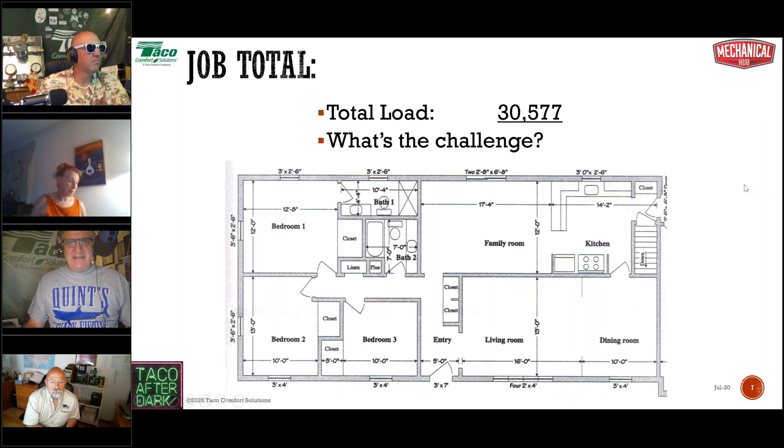It's making domestic hot water, whether it's in a combi unit or whether you have an indirect. So there's all kinds of challenges here when we're talking about a boiler that small. So we're going to look at some options here for boilers that small. We picked a couple of different boilers to consider from NTI and from Weil-McLain. So we're going to take a look first at just an NTI heat-only boiler, the NTI TX51. And I chose that one because, as you can see here, it has a net AHRI output of 45,000.

Now, net AHRI, for you old timers out there, you might be familiar with the term net IBR. Well, net AHRI is the exact same thing, but with a different wrapping on it. AHRI bought IBR, so IBR really is no more, it's AHRI. So the net AHRI output is your net IBR output. So 45,000, that's pretty doggone close, okay? From an input standpoint, it's 7.1 to 57 MBH. That's about an 8-to-1 turndown ratio.

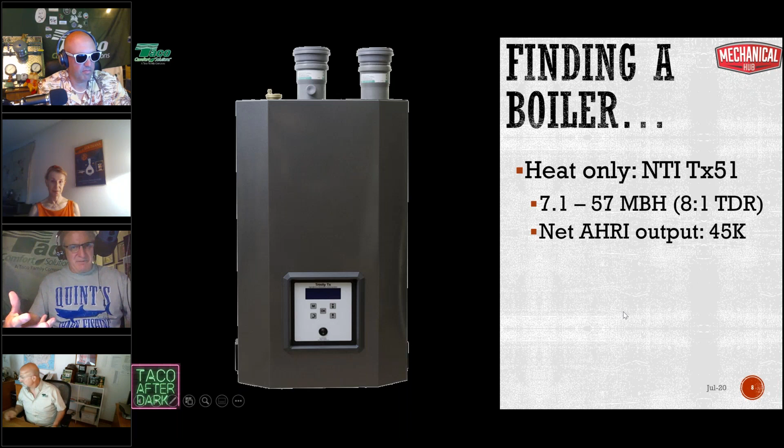But even at that low firing rate, that boiler's still going to be kind of on the big side for this project. It's not bad, but it's still going to be kind of on the big side. When we get into talking about boiler piping later on today and also in upcoming weeks, we'll be talking about how in something like this, a buffer tank really starts to become really important when you want to try and maintain the peak efficiency of that boiler, operationally speaking, not necessarily just combustion efficiency.

Now, better still, we could take another look at the NTI TRX 085. Now, that's a 9.4 to 85 MBH with an 11-to-1 turndown ratio. The DOE output is 79,000. The net AHRI is 69,000. If we had to use this to make domestic hot water, this might be a possibility here. That would be a benefit to us. With that 11-to-1 turndown ratio, that still helps us with the smaller load, but we'll still probably want to look at a buffer tank in this application, I would think.

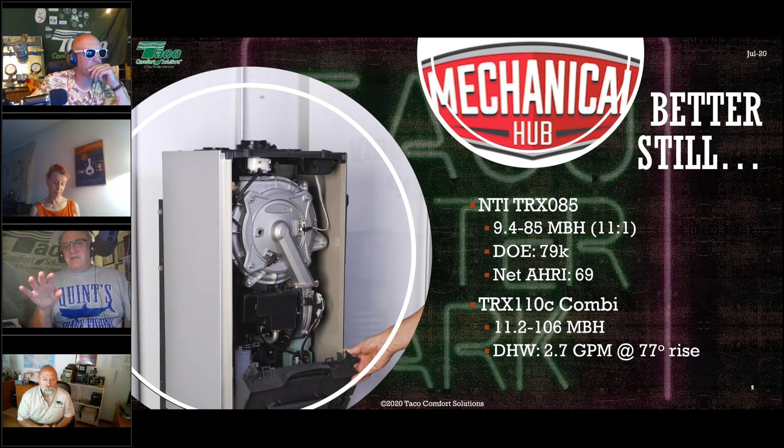If we wanted to go with a combi unit, we'd be looking at the TRX 110C. Now that's a boiler that'll do both domestic hot water and your heating system water in sort of an instantaneous or tankless type of situation. Now we're talking 11.2 to 106 MBH, again, still an 11-to-1 turndown ratio. Now your domestic hot water continuous flow is 2.7 GPM at a 77-degree rise. So if you got 50-degree water coming in, that's 127-degree water coming out, which in most cases, since you're not storing, that's probably going to be okay.

At 2.7 gallons per minute, we're not dealing with 3 showers and a hot tub all at the same time. Okay, you've got some limitations here, but in most normal applications, we probably should be okay.

And Jason Mangos, I saw you out there. If you're out there, or Wheels, if you're out there too, if you want to chime in on that output and what that means, that would be awesome. That way we give our guys a little bit more info on what that really means.

So these are some NTI options for you. And again, remember, 30,000 BTU max. That's on the coldest day of the year for heat. So again, any one of these boilers we've picked are going to be too big. We're not going to have an 11-to-1 turndown ratio if we use either one of these for heating. We're maybe going to have a 3-to-1 or 4-to-1 turndown ratio. Okay, 9.4 MBH. It's probably going to be about a 3-to-1 turndown ratio because it's just a small load. But that's better than a 2-to-1. Okay, the previous model might work out a little bit better on that end.

If we were to look at a Weil-McLain option, I'm going to look at a ModCon and just a standard efficiency model. We're taking a look at this one, the WM97+ 70CT. There's a lot of syllables there to digest. It's a small boiler, again, 14 to 70 MBH. It's a 5-to-1 turndown ratio. Its DOE output is 65,000. They don't list an AHRI output for that one. So it's 65,000. Boiler's still twice as big as it needs to be.

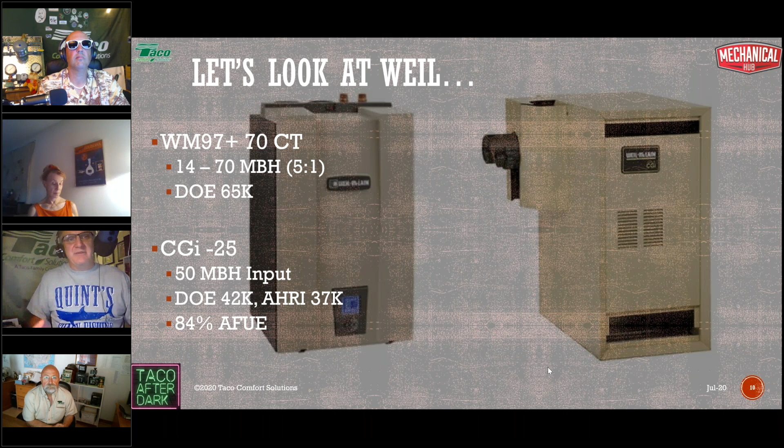And I think where you were going with this, you may find that you need a larger tank. You can certainly get around that with a much larger storage tank, so you're storing more water for those sudden dumps. If it's 2 showers and you never run them at the same time, well, then we've got different choices here. All right, let's take a look at some indirects here now as well.

So to figure recovery, this is your formula to figure the recovery that you can get out of a boiler. It's about the BTUs you have available at the boiler to make domestic hot water. You simply divide that boiler's DOE output by 45,000. Where does 45,000 come from? Well, we multiply 8.33, which is the weight of 1 gallon of water, times 60, the number of minutes in an hour, times 90. That's the DOE recommended temperature rise. That's 50 up to 140.

Now understand 50 up to 140 is going to give us a boatload of room here, okay? Because we're not going to take a bath in 140 degree water, not twice anyway. And we're not always going to be bringing in 50 degree water. That's considered a worst case scenario, unless you're in a place like Alaska where the water comes out of the ground frozen, basically. So you've got to make those different adjustments. But this is kind of a good rule to work with.

So it's the DOE output of the boiler divided by 45,000. So let's take a look at that NTI TRX 085. Okay, so that DOE output at max fire was 79,000 BTUs.

Divide that by 45,000, that gives us 1.75 gallons per minute worth of recovery. That's what it can do. Doesn't matter anything else. That's all the BTUs it has available. Okay, that's all it can do. Now 1.75 gallons per minute times 60 minutes, that gives us an overall 1 hour recovery of 105 gallons per hour. So we can recover at a rate of 105 gallons per hour.

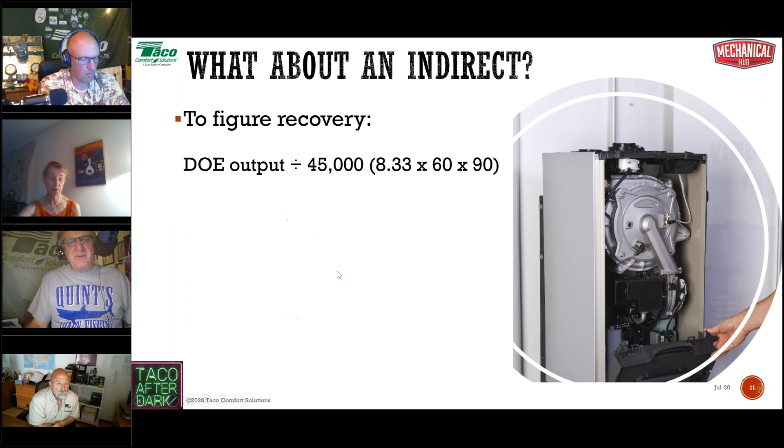So if we put that 34 gallons in with that 105 gallons worth of recovery, that gives us our first hour rating. That's how first hour ratings come by. Our first hour rating for a 45-gallon tank with this boiler, that's 139 gallons for the first hour, or we are now recovering at a rate of 2.2 gallons per minute at 140-degree water.

Now, is that going to be enough? Well, we got to do a little bit of math on the flip side to figure that out. But in a lot of cases, it probably will be. With your shower, you're not taking a bath at 140 degrees. You're tempering it down to 106, 107, or whatever it is you take a shower in. You've got your dishwasher running at a certain temperature and all these other things.

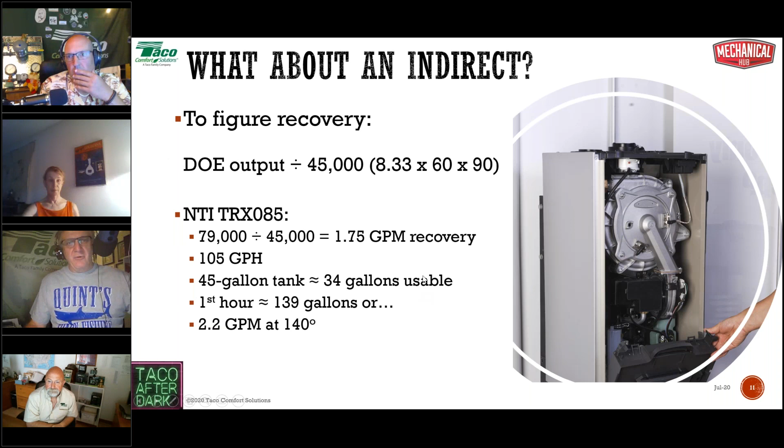And you may even put a tempering valve at the tank itself to extend that capability. So there's a lot of places to play here to see if you're going to have enough. But this at least gives you a starting point so you know what you realistically have to deal with this smaller boiler.

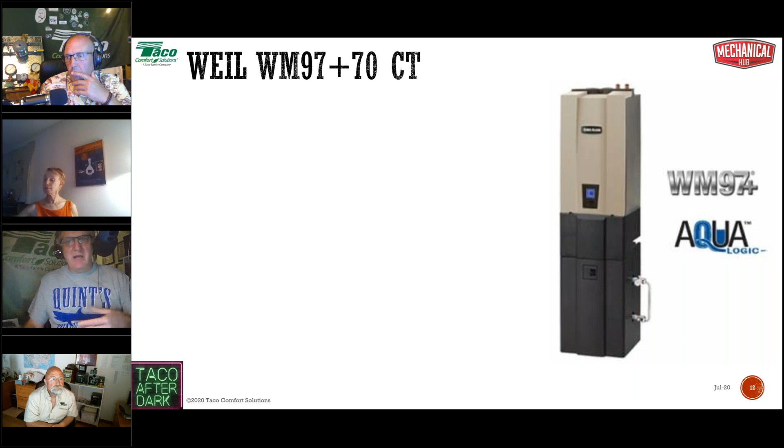Now let's take another step forward with this. The reason I chose the WM97 plus 70 is because you have this optional tank that goes with it. It comes with the Aqualogic. It's an 18-gallon tank that connects right to the boiler. 18 gallons, that's 13 and a half gallons of standby, 13 and a half gallons of usable water.

At 65,000 BTUs, which is the DOE rating, divided by 45,000, that gives us 1.44 gallons per minute worth of recovery. We multiply that out by 60 minutes. That's 86 and a half gallons per hour plus 13 and a half gallons usable. Now we have 100 first hour gallons, or roughly 1.67 gallons per minute at 140 degrees.

Again, we have to figure out A, how long, B, how hot, and C, what's the flow rate at the most important fixture. If it's the shower, if this is going into a house with a 6-person shower and you got nozzles coming at you from 14 different directions, they're a heck of a lot of fun, but it's not going to be fun for very long. You got about 3, maybe 4 minutes and then you're done. So you always got to make sure, because you don't want to be on the other end of that phone call, I'll tell you what.

So I told you, this thing goes sideways in a hurry sometimes. So this is the math, basically. This is the math behind that one.

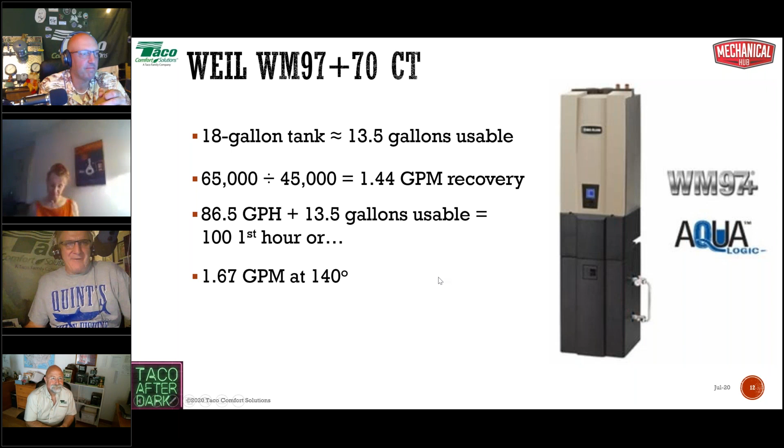In my US Boiler Aspen digitally, I can set the max BTU load on heating, and then my 10-to-1 ratio moves within that parameter. Well, that's a pretty cool boiler. That's really neat with that control. That's that Sage control that we also make on the Burnham boiler. Very good. So they get pretty cool options with what US Boiler was able to do when we designed that Sage controller that ties into their system too. It really gains a tremendous amount of efficiency into the system.

Very good. And Bill says with the water temperatures we can use for heating, we really do need to condense. Yeah, again, if we're designing around a low temperature system, absolutely. Now, if we got a multi-temperature, multi-load system, we got to make some decisions.

And there's always that option of using a high temperature boiler and then mixing down for the lower temperature stuff. If you've got 2 different temperatures, there's always that possibility. I mean, the industry is moving towards ModCon, and that's just the way it is, because it's the better choice. On a case-by-case basis, you do have to take a little bit of a different look at it. And something like this, I'm not entirely sure which way I would go, to be honest with you.

I don't know. What do you guys think? If this was your house, Dave and Rick, which way would you go for a boiler? I'm gonna KISS it. Keep it simple, stupid. Oh yeah. I can't be the only guy that knows what's going on, if somebody else comes walking into that boiler room and sees what the heck's going on here. So you lose a little bit of the efficiency on one side. You try the best you can, but I'm still looking at keeping it simple in my boiler room.

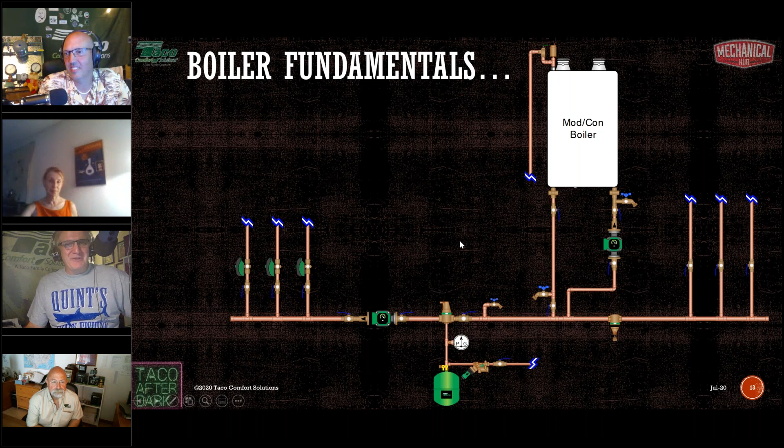All right. Let's take a look real quick at some boiler piping fundamentals before we turn it over to Carol. Again, ModCon boilers, just looking at your moose antler piping. And we're going to get into this next week a little bit deeper on the specifics of piping up a ModCon boiler and sizing the boiler pump as well as the system pumps. The air separator, just a couple of little things I want to show you. That air separator, expansion tank, automatic fill setup is sitting right there on the supply side.

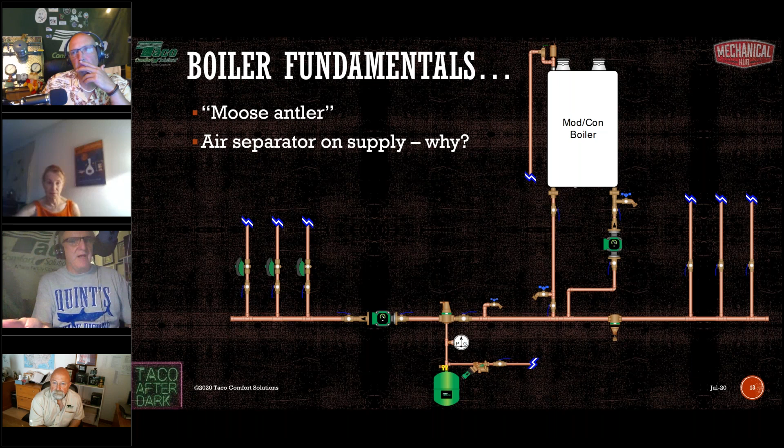Any guesses on why we put the air separator on the supply? That's where it should go, but why would you put the air separator on the supply? And if you know that answer, just type it on in. And while we're at it, the mag dirt separator, which you see over here, is always on the return. Why is the mag dirt separator always on the return? Why is it supposed to be on the return?

Okay. When we're talking about putting the air separator on the supply, a couple of you guys got it already. Very good. That's where the water's the hottest. One of those laws, is it Boyle's law or Henry's law? I can never keep them straight. One of those laws says that the higher the temperature of the water, the less capable that water is of holding dissolved gases in solution. Just think about boiling water for a second. The dissolved gases in the water start to turn into bubbles and they bubble right out. Is that Boyle's law, Wheels? I can never keep those two straight.

So if that's the case, the hotter the water, the less capable that water is of holding dissolved gases in solution, meaning those dissolved gases tend towards bubbleness. Well, why not put the air letter outer in the position on the system where the air wants to get out the mostest, where the water's the hottest? Why fight nature? The air wants to get out. We don't want it in there. Let's let it out. So that's why the air separator always goes on the supply where the water is the hottest.

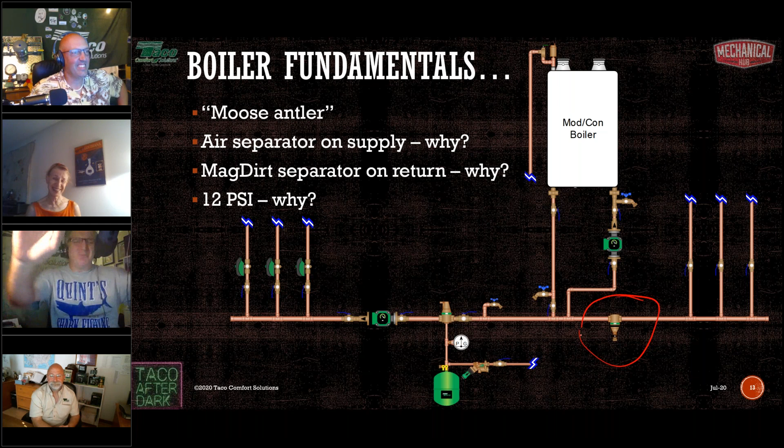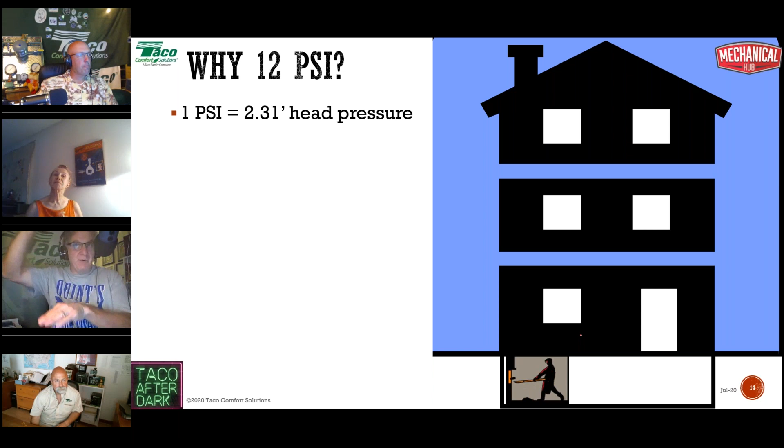But why 12 psi? Well, again, we learned this day one of plumbing school. 1 psi is equal to 2.31 feet of head pressure. A column of water 28 inches high, or 2.31 feet high, will have a gauge pressure at the bottom of 1 psi. All right, so 1 psi is equal to 2.31 feet. If we fill a system to 12 psi, 12 psi times 2.31 feet per psi, the psi's cancel each other out, and that gives us 27.72 feet.

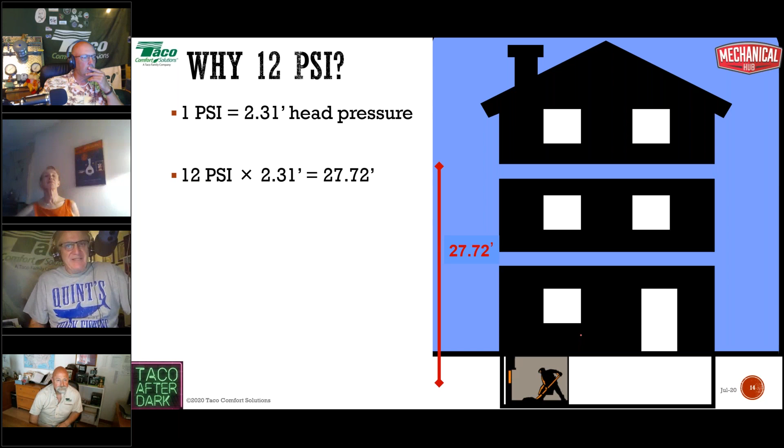That's the pressure needed to lift the column of water 27.72 feet in the air, and that, friends, is enough pressure to keep the radiation filled and pressurized on the upper levels of a normal residential structure with a little bit left over. Okay, so that's why 12. That's why expansion tanks come charged to 12. That's why pressure reducing valves are preset to 12 PSI. That's the whole 12 PSI magic right there.

If you have a taller structure, maybe you need to fill to 15 or whatever. Again, a little bit of math. And whatever you do to change the pressure on the pressure reducing valve for the system, you must also do to the air side of the expansion tank. And the only way to change the pressure on the air side of the expansion tank is to do it when there's no water on the water side. So you have to do it when there's no pressure on the water side. So that's always a fun little game to play.

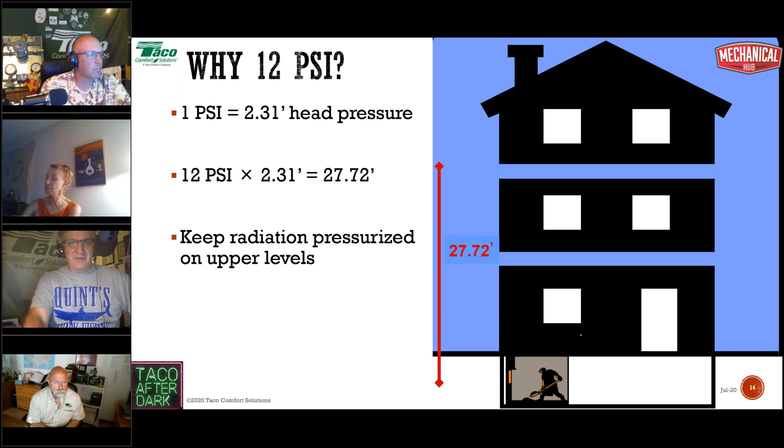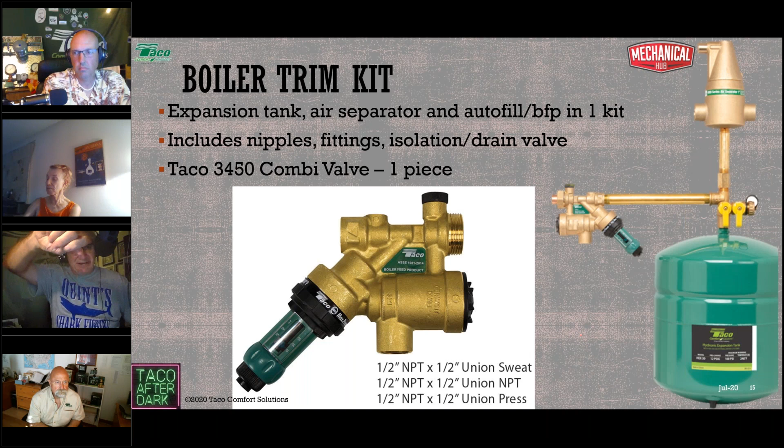I've never seen that on any other automatic fill valve. Most of them have that little set screw or something on the top where you got to kind of adjust it and kind of guess and hope where you are. Okay, but this one does not have that. This one, you can adjust it by turning the green knob, and you'll see where the pressure is set, which is terrific.

Now, as a question here, does it go into fast fill capabilities? Absolutely. That button, and this is where it gets really cool, that button on the end of the green extension, you press that in and it goes into fast fill and it stays in fast fill. And here's the cool thing: with a standard fast fill valve, you've got to lift a valve, right? You've got to lift a little lever or handle or something to put it into fast fill. And then you've got to go over and purge, right?

You've got your hose and you're closing a valve, opening up a drain, and then blowing out the air. And when all the air is out and you've got a nice steady stream of water, then you go back, you close the drain, you open up the valve, and then you've got to run back to the fast fill valve and get it out of fast fill before you blow the relief valve.

I want honest answers here. How many of you have not got back in time at least once in your career and then have had the 30-pound relief valve blow? If you say no, I know you're lying. It's pretty much everybody in there who's done that, right?

Well, with this, if you press it, it stays in fast fill until you hit the preset pressure of 12 PSI. When it hits 12 PSI, bang, it comes out of fast fill automatically. So it kind of saves you from that embarrassing, oh crap, what am I going to do with all this water thing? So that's a neat feature, neat function to that 3450 combi valve. And it's a nice little compact one-piece setup. And as you see, it's sweat, union, it's press. You have it in a lot of different options.

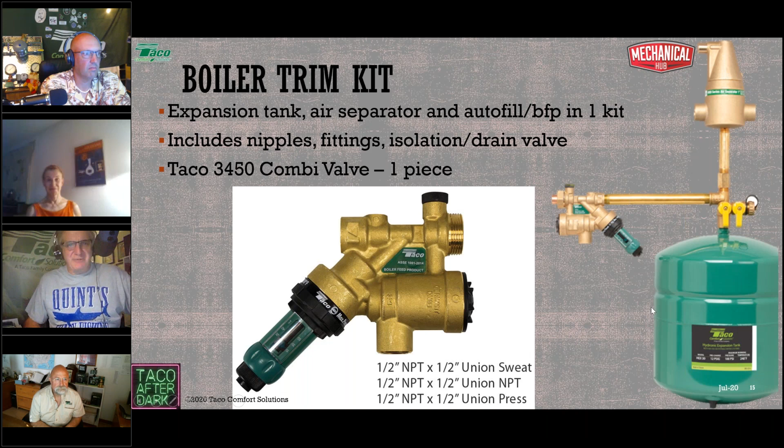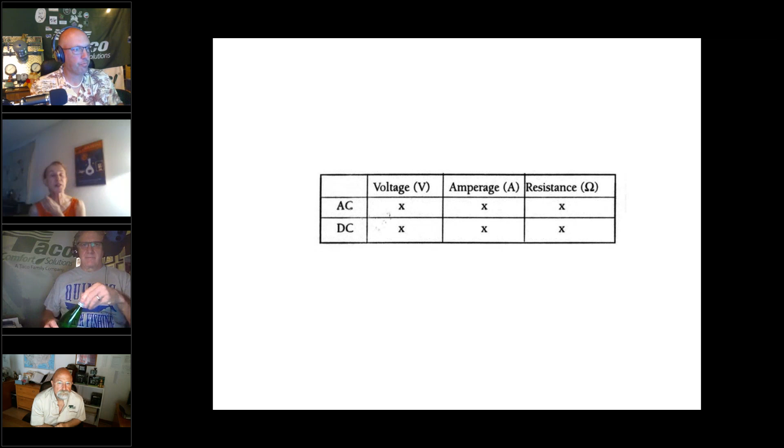A meter, this is all review stuff for most of you probably. A multimeter measures voltage, amperage, resistance. Resistance is the same as continuity, though sometimes it's shown different on a meter. And you can set it for AC electricity, alternating current, or direct current. That's batteries mostly. When we're using a meter for controls, we are looking at AC voltage and AC resistance. The rest of those possible functions we're not going to use.

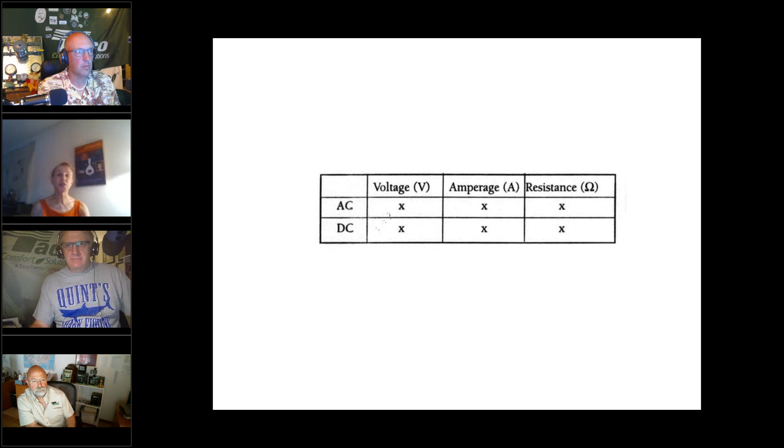We used to use the amperage back when thermostats had an anticipator, but now that thermostats are digital, we don't need to do that anymore. Meter math. This slide answers a lot of questions about what the heck is going on with a meter and why is my meter always broke. A meter is a subtraction machine. So picture your two leads, your red one and your black one.

What the meter display is going to show you is the difference between the voltage that those two leads or probes measure. So if you have 24 volts on one side of, let's say, a switch, that's one terminal, and 0 volts on the other, the meter is going to show you 24 volts because the meter is doing simple math. 24 volts minus 0 volts is 24 volts. People often think that the meter should be showing 0 because the switch is open. It doesn't work that way.

On the flip side, if you have a closed switch, for example, the meter is going to sense 24 volts on both sides or both terminals of that switch. 24 volts minus 24 volts is 0 volts. If 0 and 0 happens, of course you have 0, and the same thing holds for 120 volts.

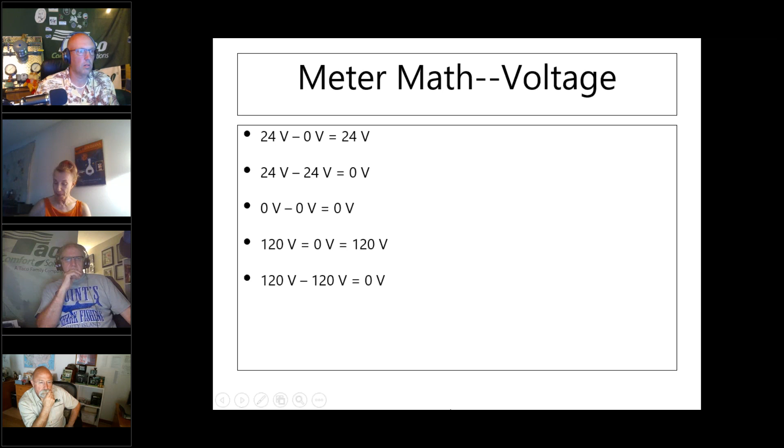If you think about a light switch, well, you have the position of the switch telling you up is closed and down is open, or on and off. But for something like, say, a limit switch or an end switch on a valve, you don't know by its position whether it's open or closed, so you might want to find out. And this would be a way to do it.

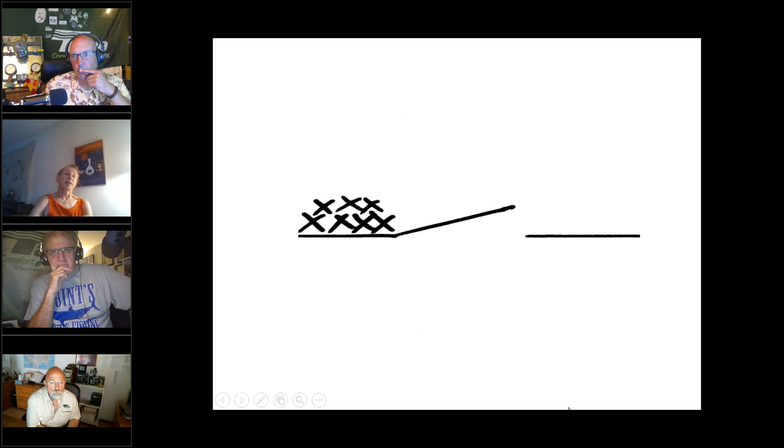Here is my little drawing of electricity guys. So a lot of classes will talk about electrons having to do with the electricity, and are electrons this way or that way? It doesn't matter. What really matters for what we do anyway, what we need to know is: is there a pile of electricity guys on one side of the switch and not on the other? So the meter will tell us.

If the switch, this is the symbol for a switch, is open, there's the opening. If the switch is open, all the little electricity guys are piled up on one side. So the meter is going to sense, let's say, 24 volts worth of them on this side and none on the other side. So the answer is going to be 24, and that means the switch is open.

We doing okay? John, we doing okay? We are rocking and rolling. We're rocking and rolling. All right. Guys, any questions, just feel free to chime on in and write them into the question section. Yeah.

Okay, that was a switch. And the meter setting on that was volts. So when you set your meter, you have a V symbol, V for volt. And the rule for what you set the meter on, you have several choices usually, is the lowest setting that is going to be bigger than what you possibly expect in the circuit. So if you don't know, heaven forbid, if your circuit is 120 volts or 600 volts, then you would choose the 600 volt setting. But if you know you have a 24 volt circuit, then you would choose the lower setting. It's just so you get a more exact reading.

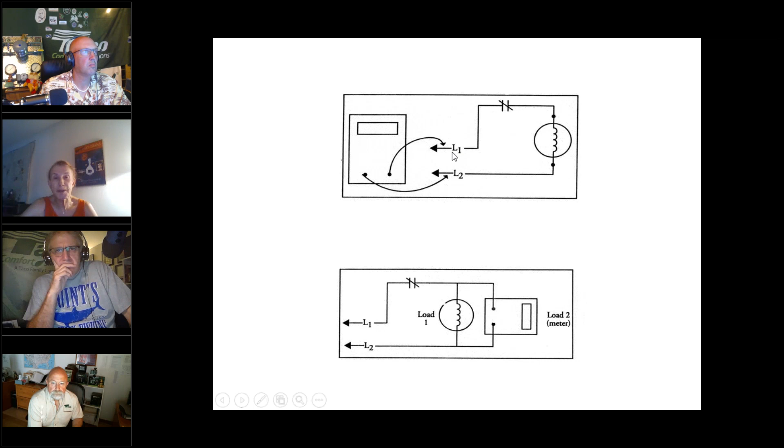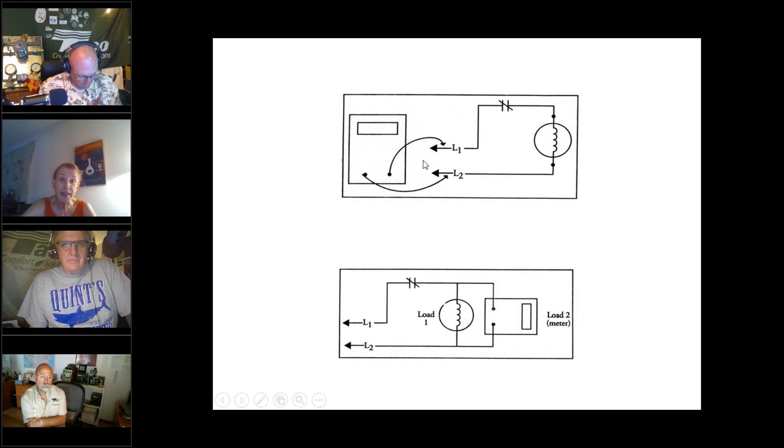Now, let's move on to another part of a circuit, power supply. A power supply is where electricity comes into the circuit. We're switching to 120 volts here. It doesn't matter what the voltage, whether we're talking 120 or 24, it's going to be the same rules. L1, L2, that stuff, we don't need to fuss with that right now. The arrows are pointing out to whatever the real power supply is. So if you're plugged into a panel in the building, then the panel is out here. If your power supply is a 24 volt transformer, then your power supply is right there. You got to put the power supply in there.

Whoops, I went backwards. Let's see if I can get it to go backwards. Nope. I forget which way to go backwards. Well, we won't do that. We'll use this one right here. Anybody know on PowerPoint how to go backwards? Type it in, John. I'd say the up arrow key or the down arrow key. Should I try that? Ah, yes, thank you. There you go. Yes, you did it.

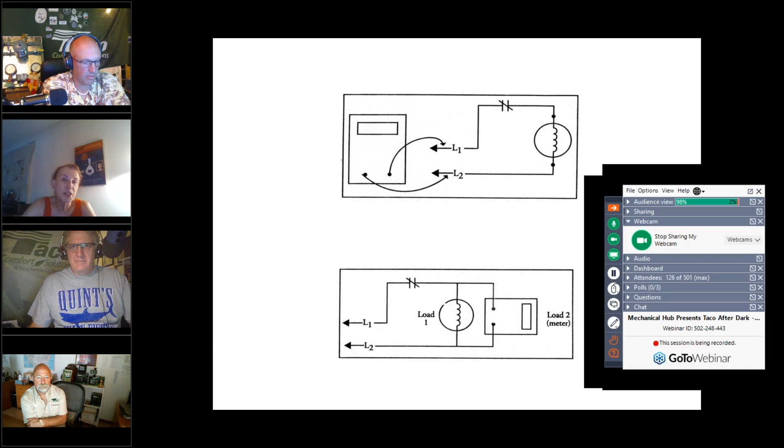Okay, what we expect here because of L1 and L2, let's say this is 120 volt line voltage, and this is what the utility gives us. So L1 is going to be 120 volts. L2 should be 0 volts. It's neutral. We don't have to worry about that. We just know that they should be different. That means that the meter is going to show us an actual number, and it should show us the voltage that's coming in on L1. So we put our meter across L1 and L2, and lo and behold, we see across the meter 119 volts. We hardly ever see 120.

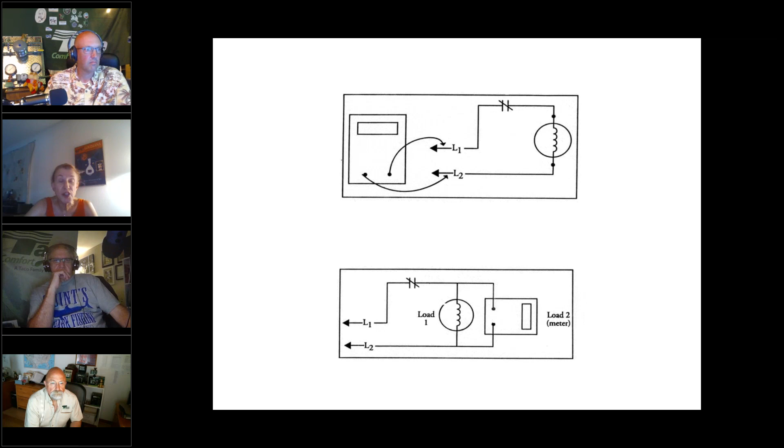The utility gets to do whatever it wants. We all know that. So it'll be whatever voltage there is today. It will often be higher in the off season for air conditioning and heating because there's less load. It'll often be a higher number in the evening than it is during the day when there's lots of electric or industrial and commercial use. But anyway, something around 120. Mostly what this is good for in controls work is, do you have voltage going into the circuit?

So back when I used to get troubleshooting calls, especially on Friday night, it seemed, the question would be, why won't my boiler run? You're my last resort, Carol. And I said, oh, good. Thanks a lot. It's Friday night and I'm your last resort. I am charmed. But often the big problem is we don't have electricity going into a circuit. So an easy thing to do is get out that old meter and see if you actually do have voltage coming in. And that is measure across L1 and L2. What do you have?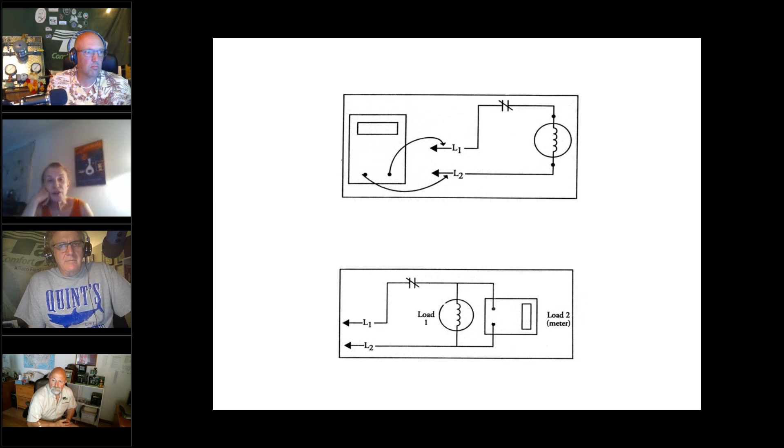Same thing for across a load. Let's review now what these parts are. So staying with 120 volts, let's say that our power supply is 120 volts coming in from the supply panel. And there's our switch. That's a symbol for a closed switch. Here's our load. Let's have our load be a light bulb. We can measure across the light bulb. So you got your black probe or your red probe there, and you got the other one on the other side. And what do you see? You know that there's electricity going through that circuit because the light's on and your switch is closed and you have power into the circuit.

But remember that a meter is just a subtraction machine. So if you have 120 volts coming in here and 0 volts coming out there, that means the load ate up all the electricity. And that's what we expect.

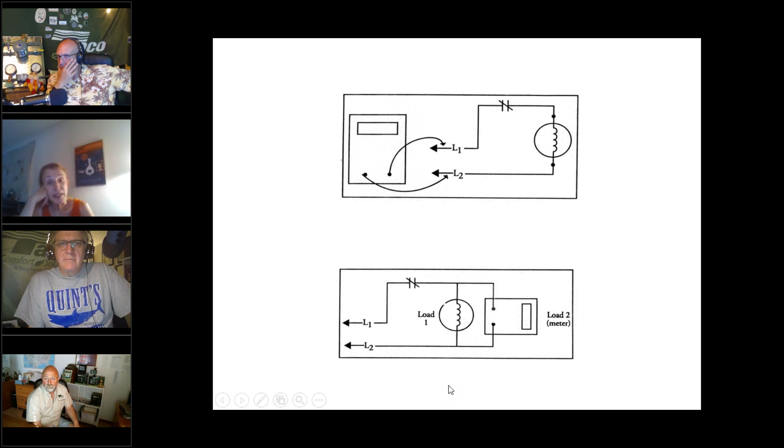Okay, let's move on to where are we now? We have a little review here. I want to go back to meter math review. 24 volts on one side of a switch or a power supply, and 0 volts on the other side is going to tell us a different message depending on whether it's a power supply or a switch.

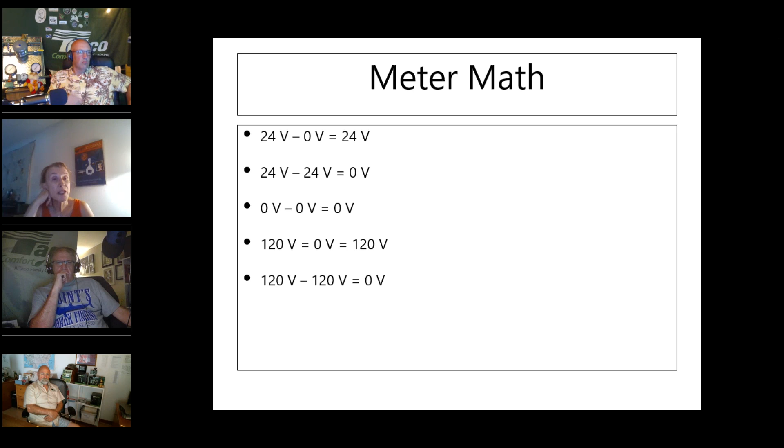If it's a power supply, it tells us, yes, we have voltage into the circuit. We got some. If it's a switch, it tells us in this case that the switch is open because the voltage is different on the two sides. Let's go back and review that.

The switch is open, it's turned off. 0 volts on the other side, and that tells us the switch is open if we see 24 volts. If we see 0 volts, the switch is closed. And again, that's useful for those many switches in our world that you can't see whether they're open or closed.

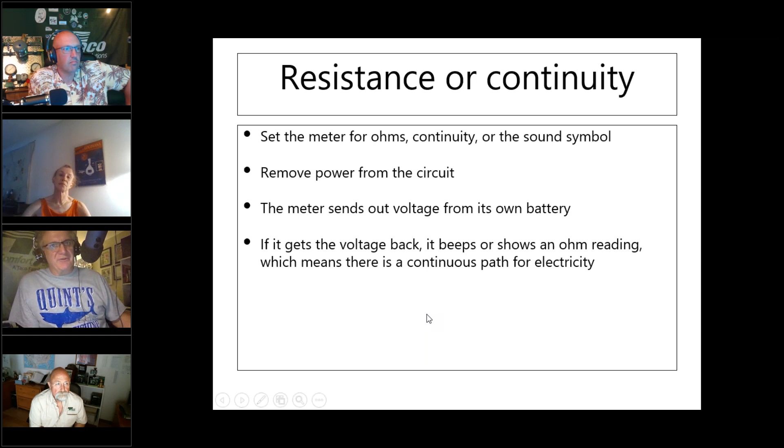I can remember doing a boiler replacement many years ago. The rest of the house was going under a minor rehab, but we replaced the boiler, and the customer was just not happy. They kept saying, boiler's not working, we're not getting heat, at least on the first floor. Second floor is okay. All right, I'll be there in the morning. Show up in the morning, they're getting heat on the first floor.

And I say, I've tried a bunch of different things. I can't make it do what it was doing last night when you called me, and I don't know what to tell you. He says, well, okay, I guess it's working fine. Same thing next day, same problem. Boiler's not working. Upstairs is fine. First floor isn't working. Something's crazy going on here.

I don't know what it is. And they started getting really mad. And every time we went back, we could not make the problem happen again. It would only happen, and this is when, okay, after 6 or 7 visits, it's finally time to ask a few questions, duh, you know.

What time does this happen? And I says, it's usually, you know, between 5 and about 7:30, 8 o'clock, I got nothing. Then sometimes after 8 o'clock, when I have to go to bed, it works okay, but it's a 5 to 7, 5 to 8 o'clock problem. I said, huh. And nothing changed? Nothing else changed. I said, no, nothing else changed.

So I'm poking around and I go in the kitchen and I see the oven, okay, the stove or the oven. Then I go into the family room. On the other side of the oven is a thermostat that wasn't there before. The thermostat was on the other wall before, but they moved it to this wall because that's where they wanted to see it, on the other side of the oven. And the oven would get hot when they'd make dinner. No heat. Sure. Yeah, that consumed about 2 weeks of my life. Go figure. Yes. Or a lamp or a television back when they created heat.

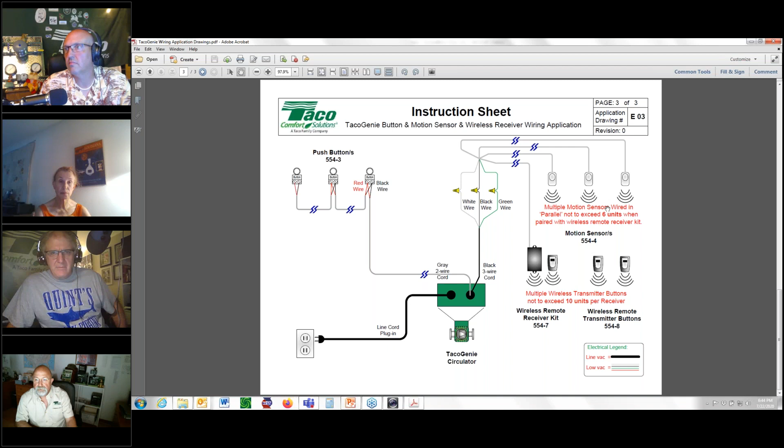And then thirdly, on the last page, I can do momentary contact buttons that are wired. I can do wireless sensors along with the motion sensors along with the wireless. Again, 10 is the number here on the multiple wireless transmitters, and 6 is the limit on the motion sensors. So. All right.

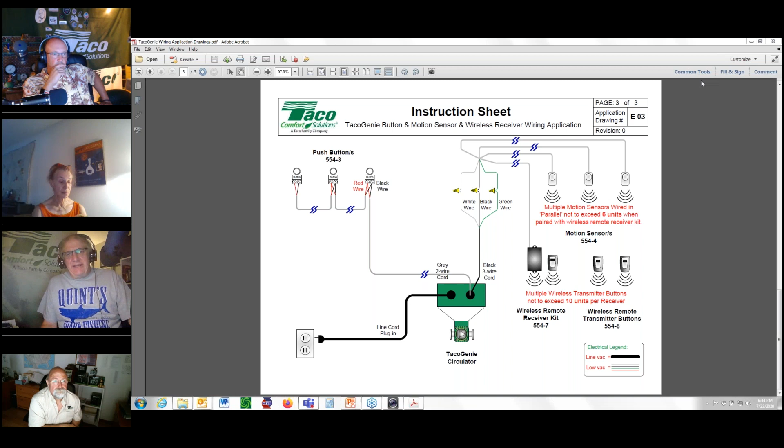Here's a question. How do you size pumps for a mix of 50-50 glycol and water? Well, that's a good question. Basic pump sizing is you've got to find your flow rate. And to find the flow rate, we typically use GPM equals BTUH divided by delta T times 500. GPM is your gallons per minute flow rate. BTUH is the heating load. Delta T is your design temperature drop across the heating circuit.

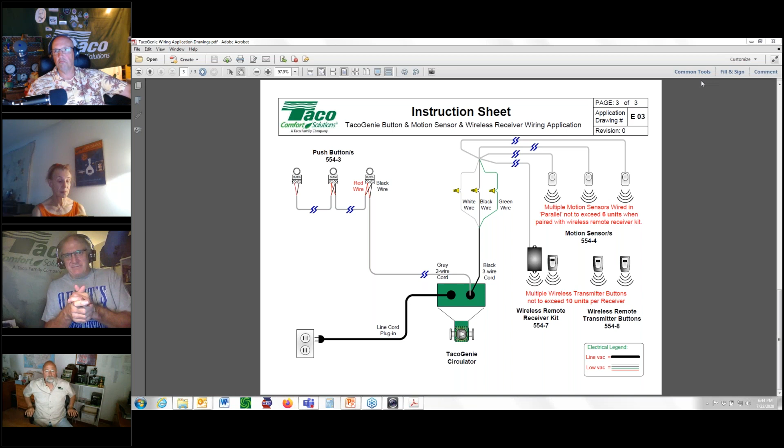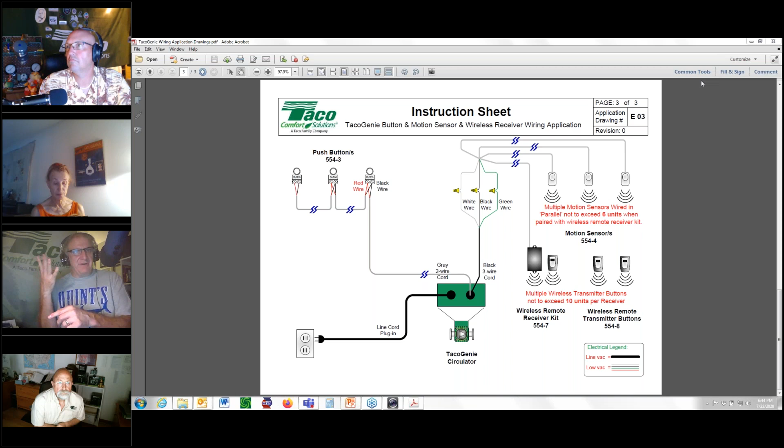Typically 20. For radiant, it might be 10. For snow melting, it might be 30. For indirects, it might be 30. And 500 is a constant derived from multiplying the weight of 1 gallon of water, 8.33 pounds, times the number of minutes in an hour, times the specific gravity of the fluid, water being 1, times the specific heat of the fluid, water being 1. So 8.33 times 60 times 1 times 1 is 499.8. We'll call it 500.

Now, the more glycol you put in, that 500 number gets lower. What you need to do, and this is the short version, Roger, is figure out what glycol am I using and what is the denominator. I've got to find the specific gravity and the specific heat of the percentage of glycol that I'm using. So I've got to figure 50% glycol, 50% water.

What's the number? What winds up being the denominator? What takes the place of the 500? Is it 430? Is it 435? Is it 450? It's going to depend upon the fluid, and it depends on the mix and depends on the brand that you're using. Once you do that, then you can do the math. You'll find that your flow rate is going to be higher than it would be with straight water, obviously, because

30 times 500 is 15,000. 30 times 400 is less. Okay, it's going to be less. So your required flow rate is going to be a lot higher. That in turn is going to create more head loss through the piping circuit. So you got to figure out what the head loss through that piping circuit is at the higher flow rate, at the temperature of the fluid that you're running, and then that's when you get your flow and head, and then it's simply the same thing you've been doing.

That might be another session we can do, because I've got actually a presentation on how to do just that. We can do that as well in the future, to figure out doing 30% glycol mix, 50% glycol mix. And the thing about glycols, and I think Rick and Dave can verify this, is they're not all the same. Depending on who makes it, you're going to get different numbers and different values, and there's no industry standard. So I can't just say all glycol 50%, it's going to be this number.